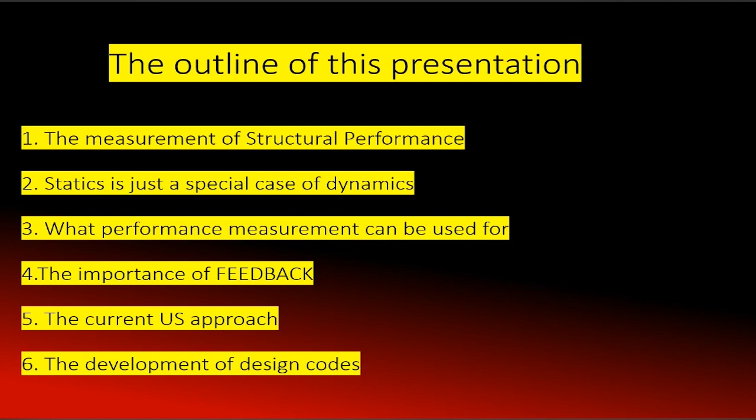This is for archiving data, and we use triaxial accelerometers. These are just about the most sensitive available anywhere in the world. They're actually produced in the United Kingdom.

Now, we need power, which we can get from solar, or if we are lucky, from a building or somewhere close by. And we need to send the data back to our headquarters, which we can do by satellite communication. So everything can be run by solar power, and we send the data back over satellites if necessary.

If you solve it for a single degree of freedom, then the time-varying force acting on the structure is equal to mass times acceleration, and then the opposing forces. The first one is a dissipation term, which is damping. And the last one is the stiffness of the structure.

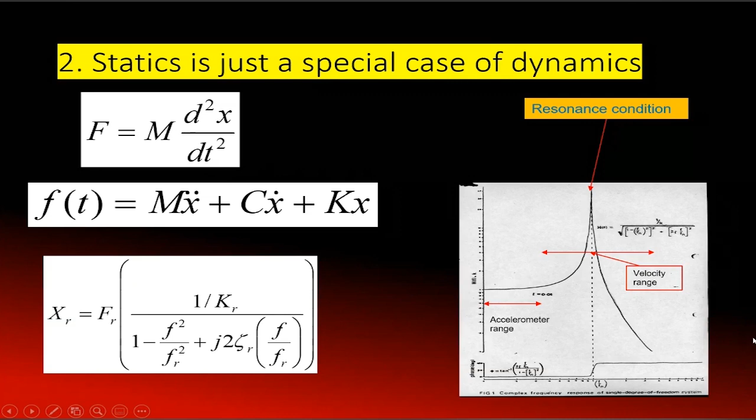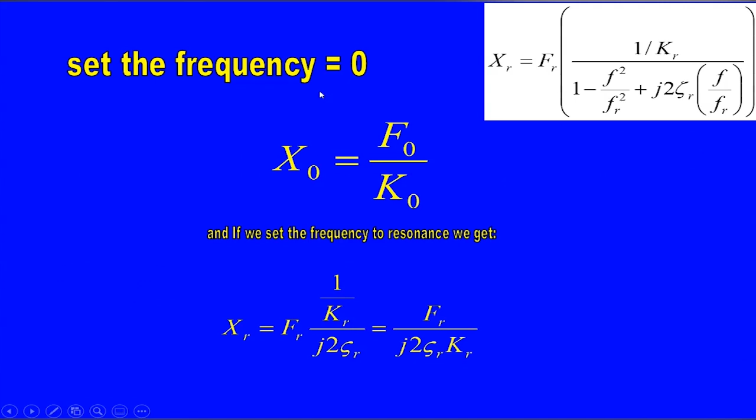That's because if we use this equation, and instead of having a frequency equal to the resonance frequency or a variable, we set the frequency to 0, then we find that the response equals the force divided by the stiffness. Statics, in other words. That's what we teach in schools.

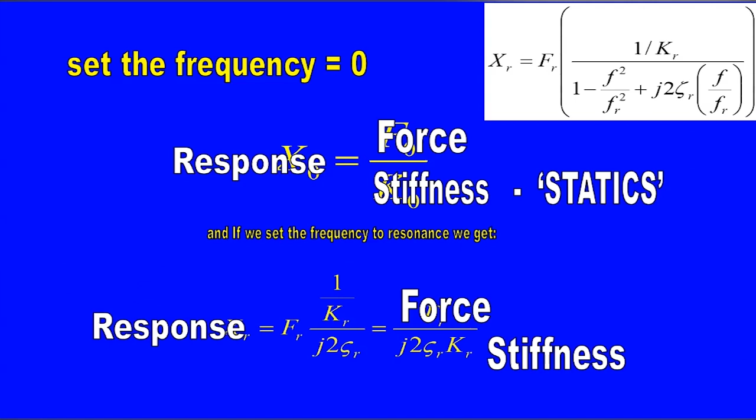But it's only part of the story. If we actually take the frequency equal to the resonance frequency, then we still have response equals force divided by stiffness, but now we have a dynamic magnification factor.

And up at the top right, you see that this dynamic magnification factor is actually 1 upon 2 zeta, where zeta is the damping ratio, and the j square root of -1 shows that we've gone through a phase change as well. So we've got a single equation which we can use either for statics or dynamics.

And that does mean that there's a link between statics and dynamics. The dynamic magnification factor is all important here.

Now, you would think, given that, it ought to be fairly easy. Just divide by the dynamic magnification factor, and you've got the relationship between statics and dynamics. The problem is that the damping ratio is a very complex factor, and it's nonlinear.

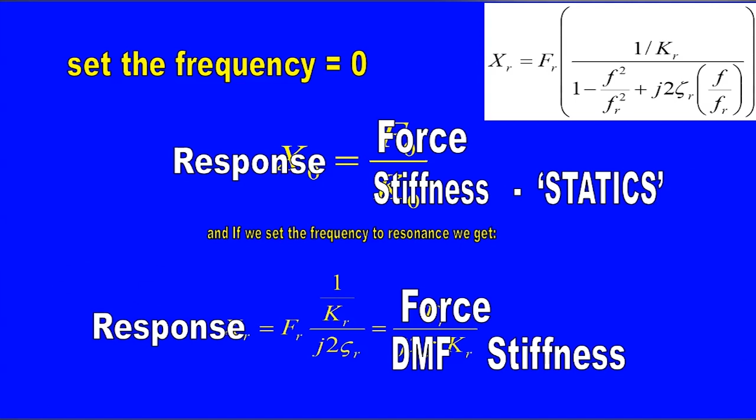For years, that's separated earthquake engineers and wind engineers. But now that we're looking at response, and we understand these nonlinearities a little bit better, we can actually move between the disciplines. So this is what we're actually talking about.

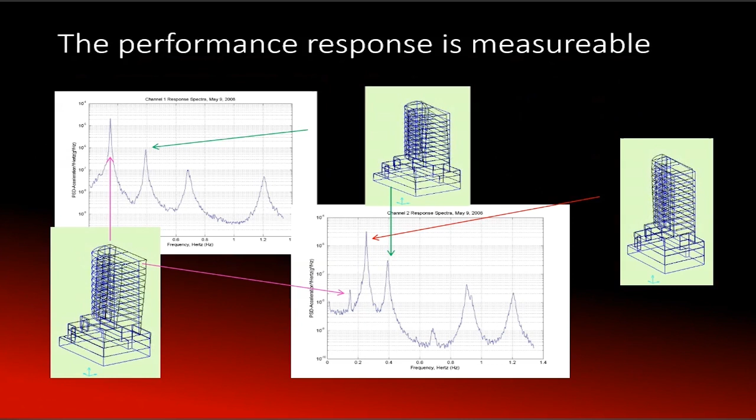Using a power spectrum density, we can actually tell what these resonances are, and there's a lot of extra information as well. Going back to that equation, it's also the equation for design, because it tells you what the displacement is going to be for a particular force. Now we've got the dynamics in there as well. We have the natural frequency of resonance or sway of the structure, the damping ratio associated with that mode, and the mass of the building. But we can alter these things around, and we can say that the risk associated with that structure is its measured response, its measured performance over its expected response.

Now, the expected response is what was used for design. So, in other words, sometimes we have to go back to the codes of practice that were in force when the structure was built, and we compare the measured performance with that.

Now, we can convert that risk ratio, which is a fraction, into a return period or a risk per year. Normally, in the United States, we start off with the 50-year return period, which is a probability of occurrence on average of 0.02 per year. We talk about the 50-year response, but we don't wait around for 50 years to see it. It happens, and it can happen quite often. It's merely a shorthand for the amount of risk that we've got.

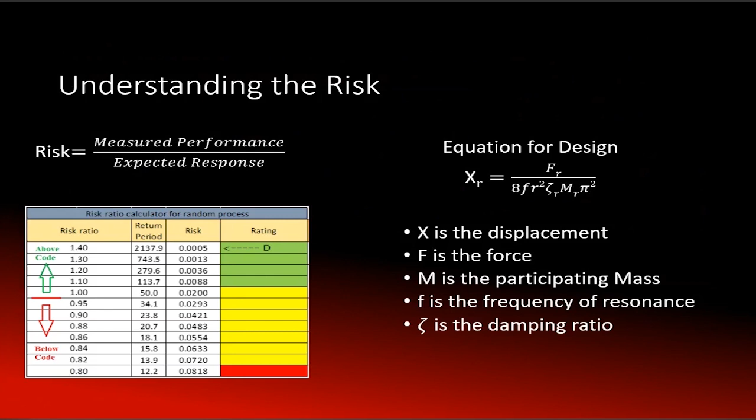Back in the BRE research days in the 1970s, we used an induced vibration scheme. We had 4 synchronized vibrators, and we shook structures. It's the only large-scale set of tests conducted on full-scale structures anywhere in the world. A number of places have done individual tests.

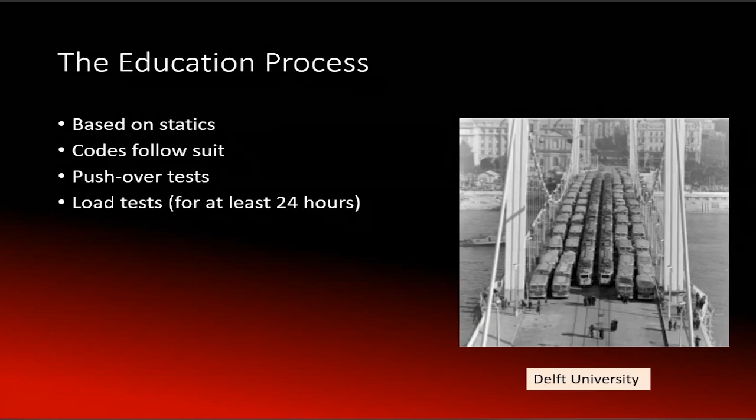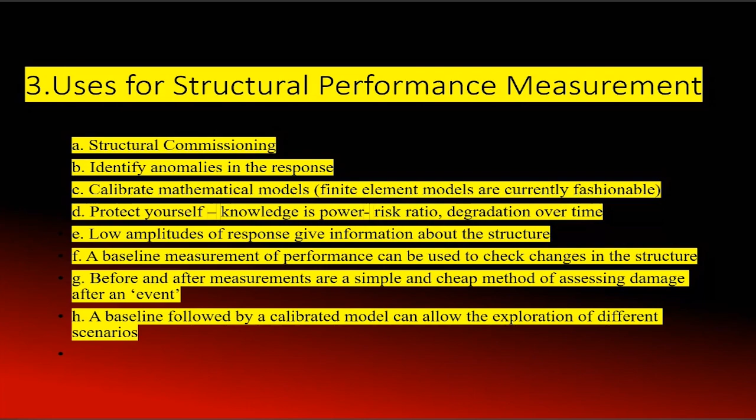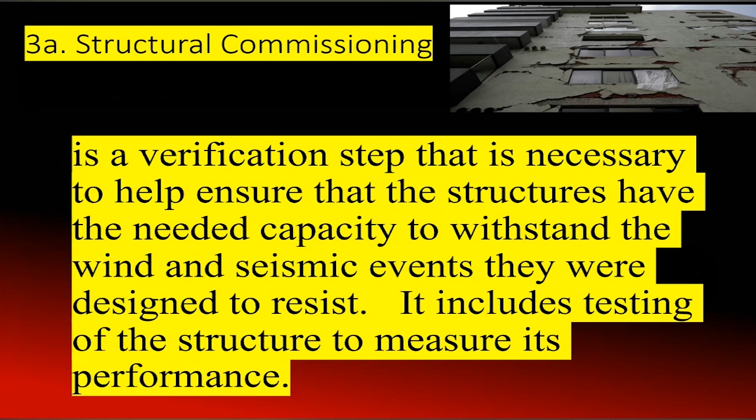So first, structural commissioning is a verification step necessary to help ensure that structures have the needed capacity to withstand wind and seismic events that they were designed to resist. It includes testing of the structure to measure its performance. A big example is the Opal Tower in Sydney.

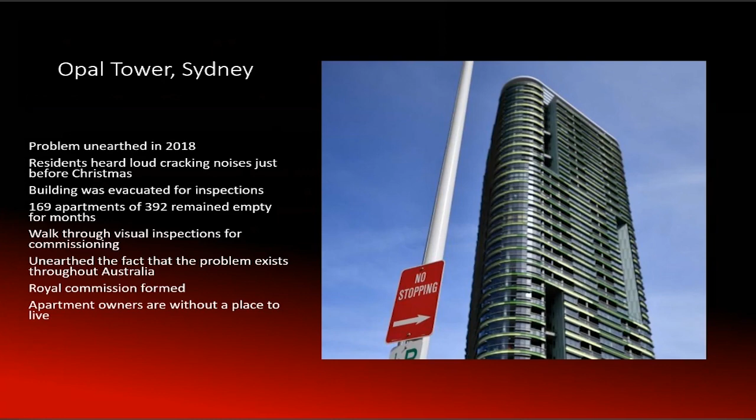There was a lot of complaints. 169 apartments in this prestige building had to be emptied because the residents had heard loud cracking and there was all sorts of damage to the structure. A royal commission was formed. I don't think they have done anything as yet, though, or reported yet.

Anomalies in the response—this I'd like to go into a little bit more detail. This building here is just by the side of the Kosciuszko Bridge. Now, Kosciuszko was a general who fought with the Americans in their War of Independence. The tallest mountain in Australia is Mount Kosciuszko, but it's called that because the mountain looks rather similar to somewhere near where Kosciuszko lived in Poland after he'd gone back there when the Americans refused to pay him.

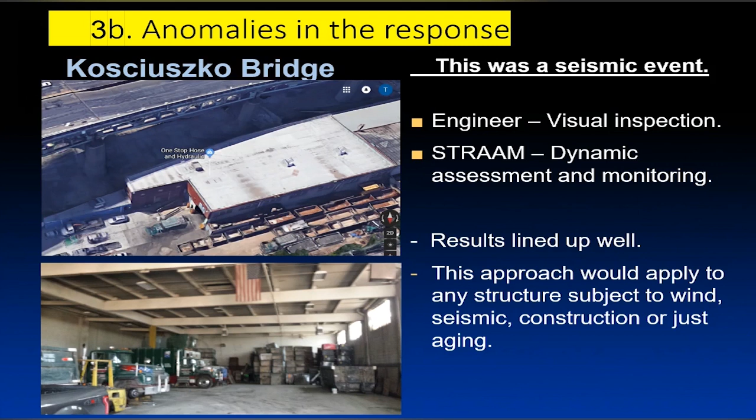So in this particular case, we created a seismic event. If you look in a little bit more detail, there is the Kosciuszko Bridge, and there is our structure. We had a pre-deconstruction assessment before the event. What they were doing was blowing up this bridge so that a new one could be placed by the side of it. They reckoned they were going to have 1.8 inches per second, and the classic information is that at 2 inches per second you're going to be okay.

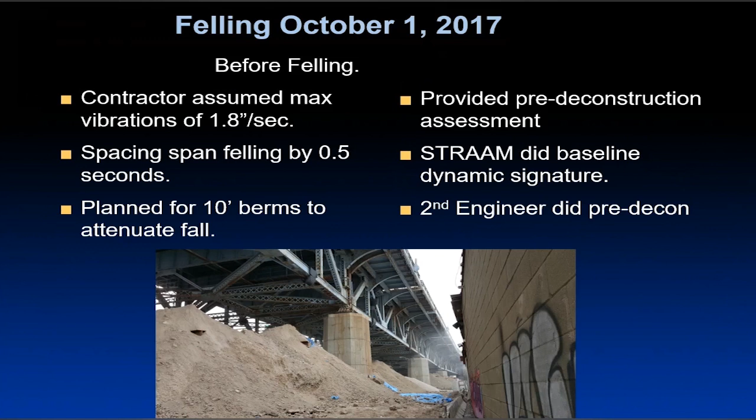Well, we looked at this and found that the structure itself had a very flexible roof, and that in fact, by the side of the bridge, the movement was transmitted over to the back face of the structure. So the bridge was demolished, and the first mode at 3.22 hertz of this structure was only 50% of what would be normal for a single-story structure of this form.

The roof also had a resonance at 3.5 hertz, which was very close to the first mode sway, and it also had very low damping. So we identified what was going to happen if they went ahead with the test as it was—there would be amplification because of the roof movement. So the structure is fundamentally weak.

That's the bridge after it was blown up. We convinced them to increase the size of the berm so that falling sections of the bridge didn't create such a large force, and we convinced them not to blow up individual sections one after the other.

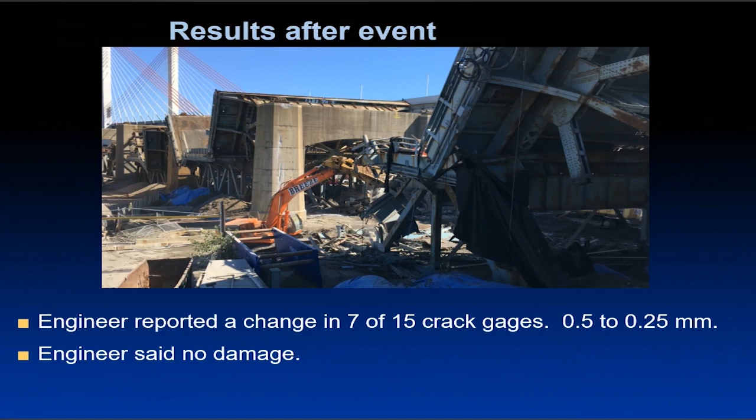The engineer in charge reported a change in 7 of 15 crack gauges of between 0.5 and 0.25 millimeters, and he said there was no damage. We, on the other hand, looked in rather more detail. The frequency changed from 3.22 to 3.15 hertz immediately—immediately, the bridge was felled.

A 2% difference in frequency equates to a 4% difference in stiffness. And look, the shape of the spectral response changed before and after what happened—this is before, and that's after. As a spectral response gets wider, it means that there's more damping.

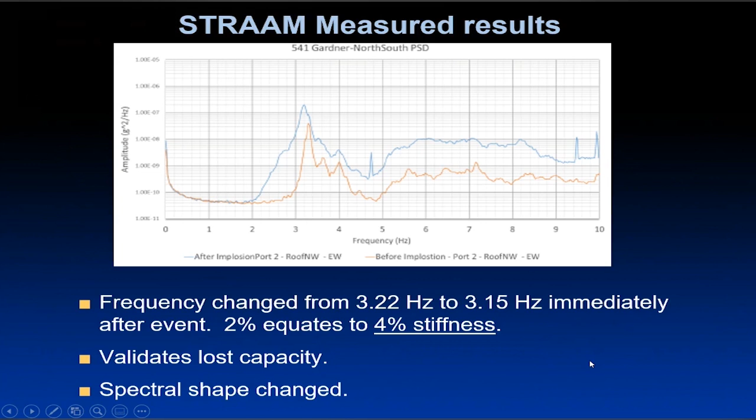Now we use a version of the random decrement signature, which is actually a way of getting nonlinear damping from a structure. There are one or two mathematical niceties that you need to include in your algorithm so that you can get rid of singularities, but it is possible to do, and we've used it a great deal, including calibrating against those induced vibration tests.

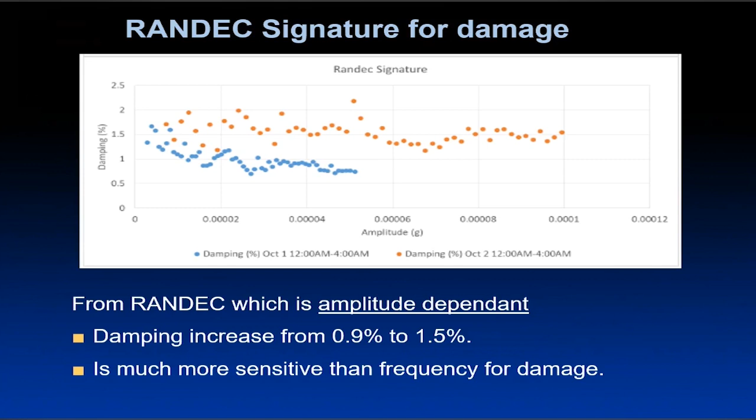So what this did was to show us that before and after, damping had risen from 0.9% to 1.5%. In other words, damping is much more sensitive to damage than is the frequency.

And we calculate the risk ratio and convert that to a return period for that event, which would take the structure outside the elastic range. Before the felling of the bridge, it was a return period of about 13 years. After, it was 2.3 years.

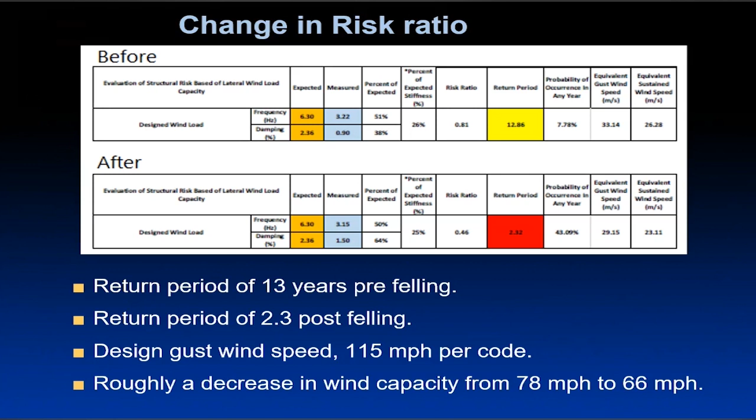So what this means is that the wind speed that would cause the structure to exit the elastic range had reduced from 78 miles an hour to 66 miles per hour. And the code of practice for this region of the United States says a structure should be designed for 115 miles per hour.

Next, the calibration of mathematical models. This is a large arch dam, and you can see it's very easy using finite elements to produce a model that looks really impressive.

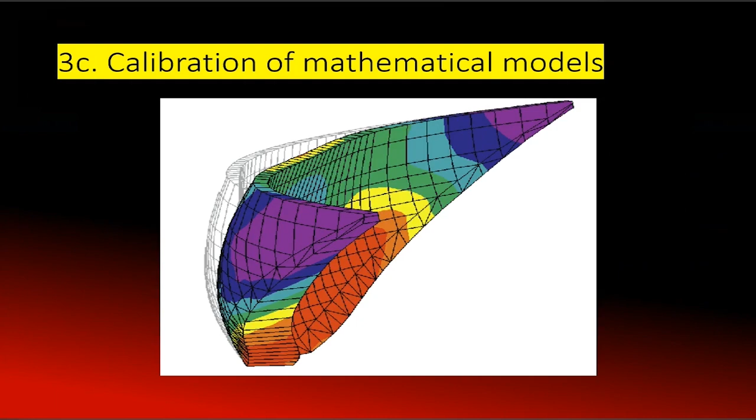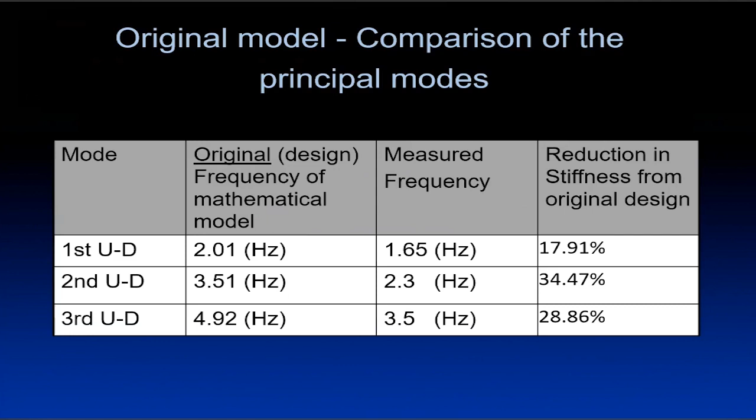The problem, though, is that if you compare measurements with what actually happens - for a very large dam this shows 1.65 hertz measured frequency versus 2 hertz in the mathematical model. So there's an 18% difference between the real response and the mathematical model. In the second upstream-downstream mode, it's 35%.

After we've gone into the calibration of the mathematical model, we're able to get very close to what happens in practice. Now that's only a 35% difference. Sometimes we find differences of a few hundred percent between the mathematical model and the measured response.

The reason that happens is that a person doing mathematical modeling decides what to include in that model, and they can decide not to. If you're doubtful about somebody who is mathematical modeling, ask them, did you include the doors in your model? They'll say, no, of course not. Then you say, glass panels? No. Who decides? Do you decide, or is there some sort of technique that you've got? Of course, it all comes down to skill - some people are more skillful at this sort of thing than others.

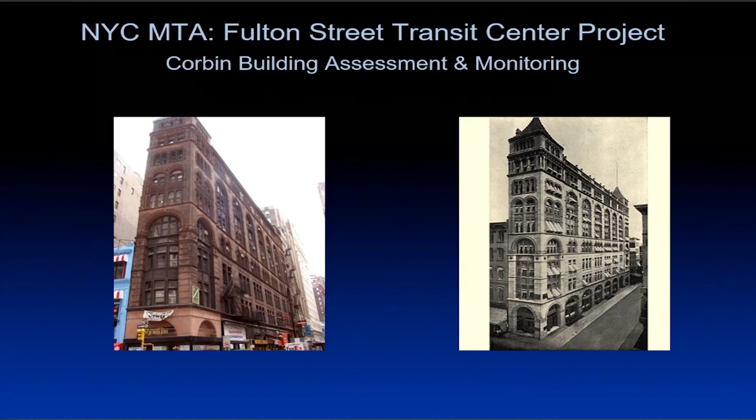Now I want to go to this structure, the Fulton Street Transit Center. The Corbin building is an old icon, and we assessed it and monitored it. Here are one or two views of that building. To the northern side, you can see this great big brick wall and a pit by the side of it where they created the new transit center, which goes down to the World Trade Center.

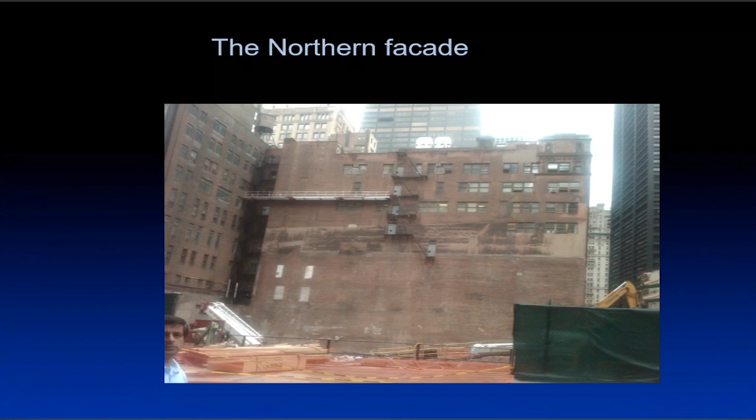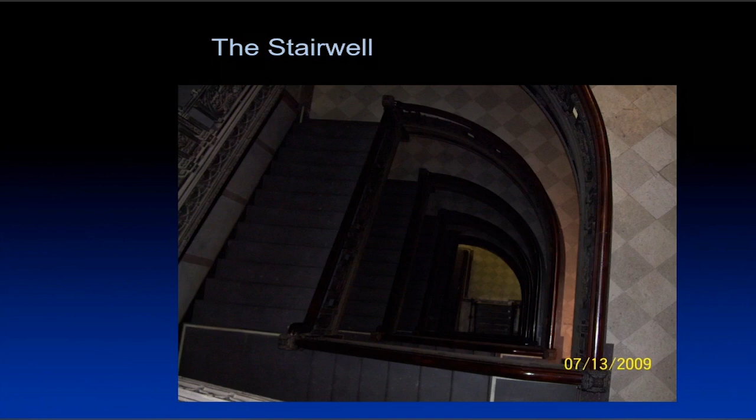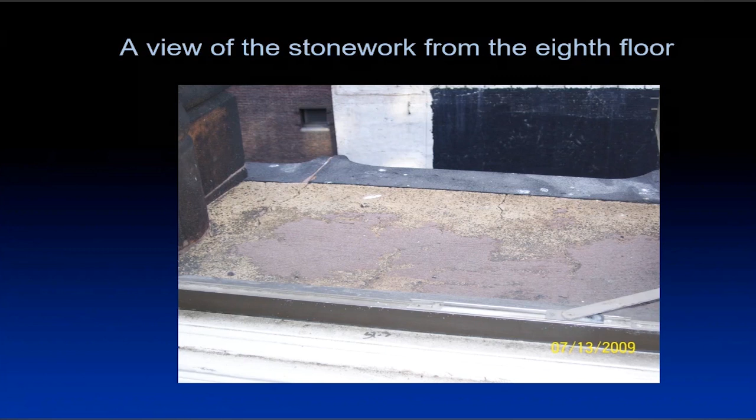Looking at that, they were worried about it. The stairwell in the structure was of extreme importance, and the stonework of the building was of importance. The stonework on the side of the buildings had cracks, and the floors had been partially taken up. There were cracks on that northern wall, but we did have drawings available.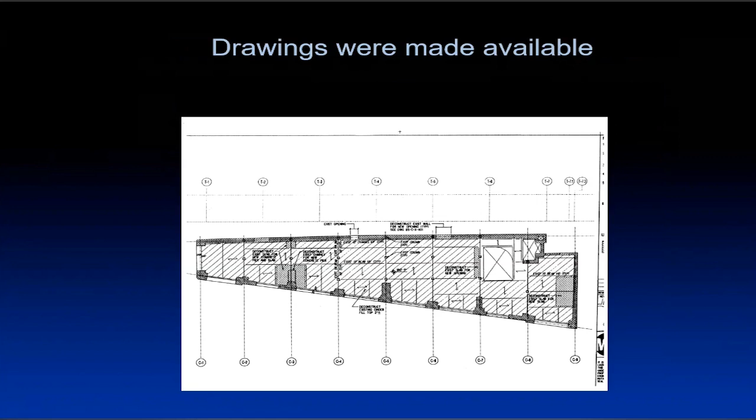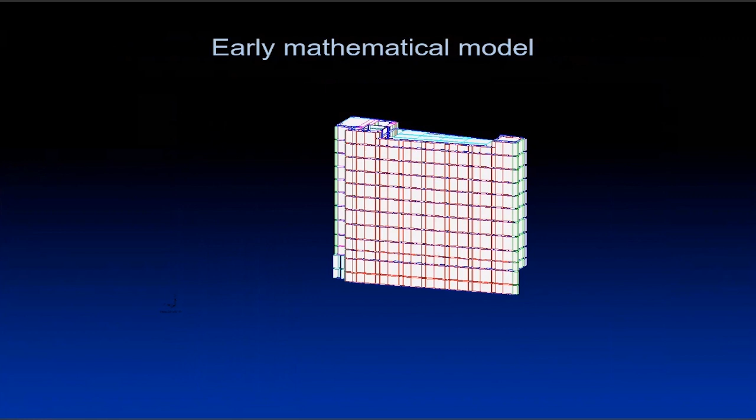I did a lot with this model, and the only way that I could get the calibration was to say the floors are just 2 inches thick. Well, I ran into a lot of flack because of that - nobody builds with 2-inch thick floors, they said.

As a matter of fact, if you take a good look at some of the older subway stations in New York City, you find this same style of construction in there as well.

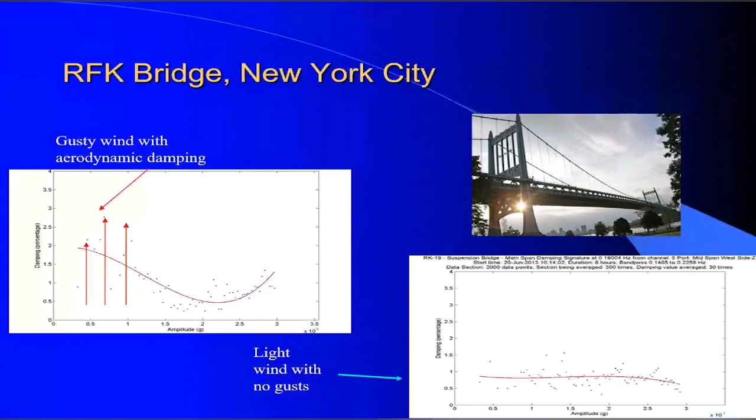The RFK Bridge in New York City is another example of what you can find with structural commissioning and performance measurement. The two spectra here show the damping ratio obtained from the random decrement with a gusty wind, and on the right, light wind. You can see they both come down to about 0.5% of critical, but at low amplitude with a gusty wind, you can actually see the interaction of wind and the structure. In other words, we have aerodynamic damping, and you can measure it using the random decrement function.

The question became: can I go back in? Can I get my belongings? Well, with a performance measurement, it is possible to get a very quick determination of not just whether it's safe to go back inside, but also whether we can get people using the structure again at an early stage.

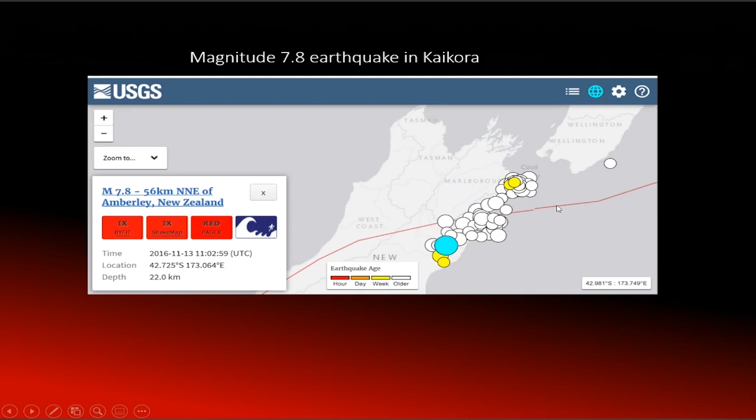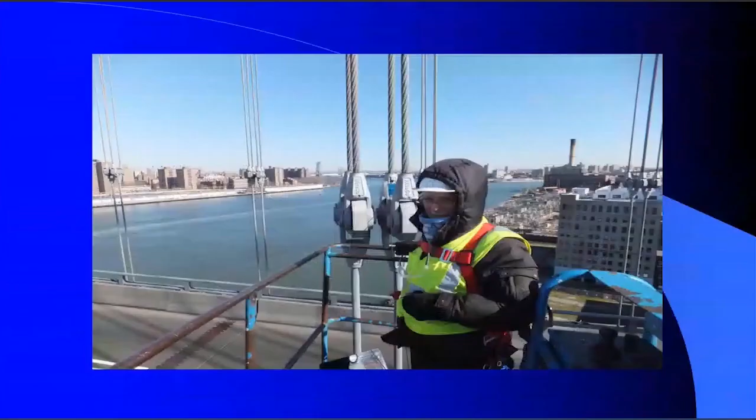Also in New Zealand, we had a magnitude 7.8 earthquake in Kaikoura, on the southern island, and 50 aftershocks which gradually got closer and closer to Wellington, their capital, at the southern end of the North Island. We had done a presentation for them, and as they found these aftershocks getting closer to Wellington, they became interested in what we might do to help them. So we looked at 10 different buildings in New Zealand, in Wellington. And let me say there are various other things as well.

This is the Manhattan Bridge in New York City, and we used performance measurements of the support cables, because they're supposed to be at the same tension. You can actually measure the tension indirectly by measuring the natural frequency of the cables.

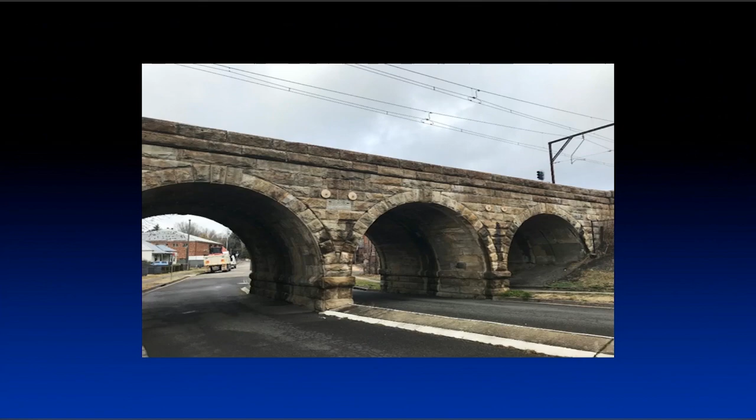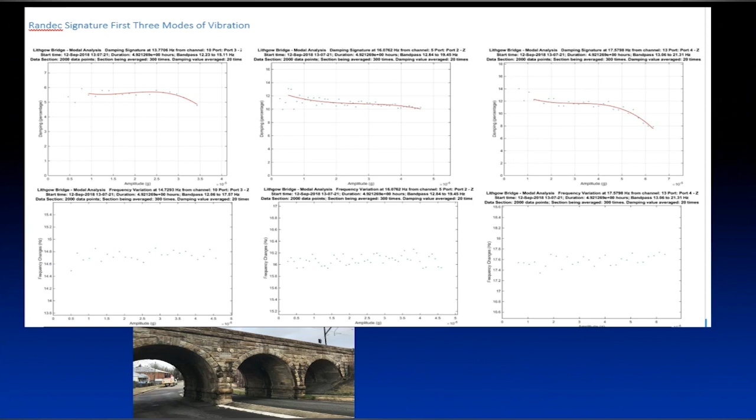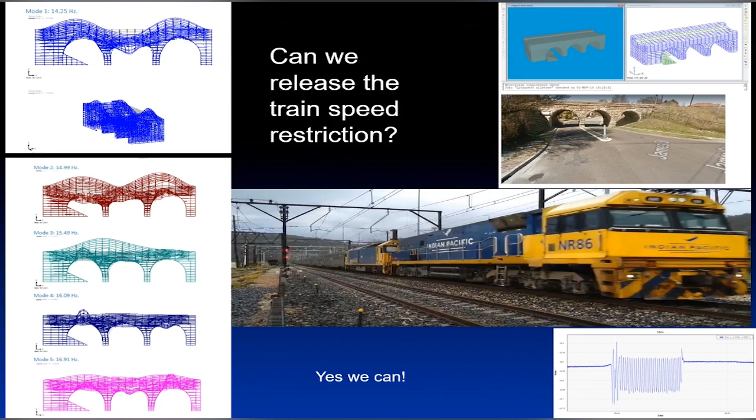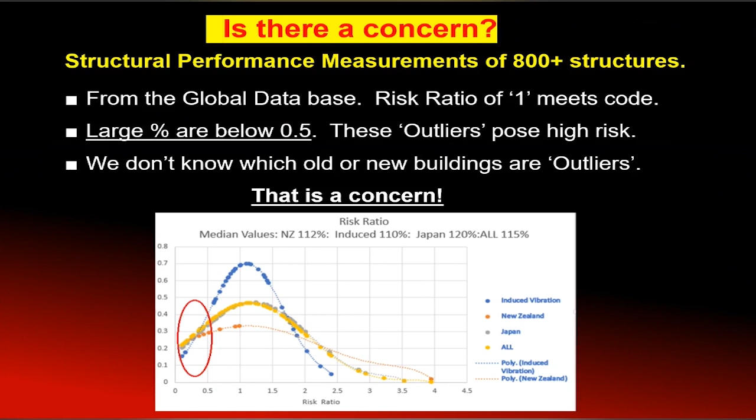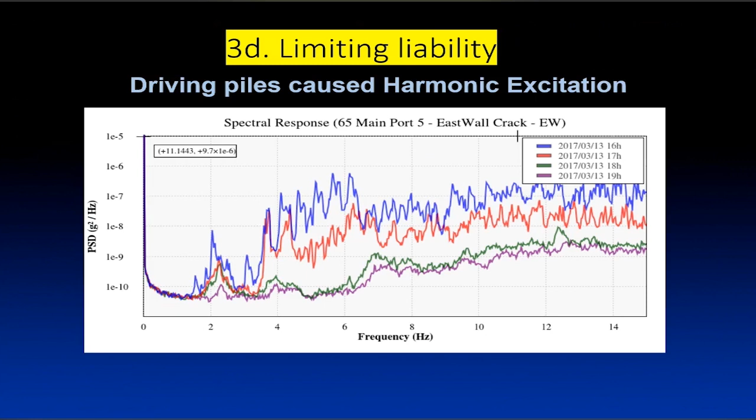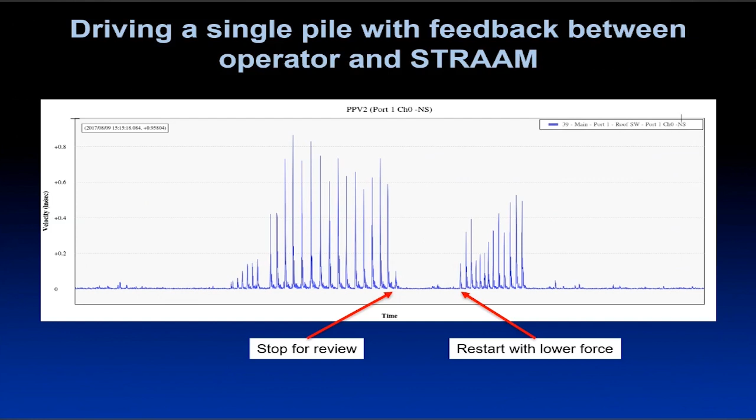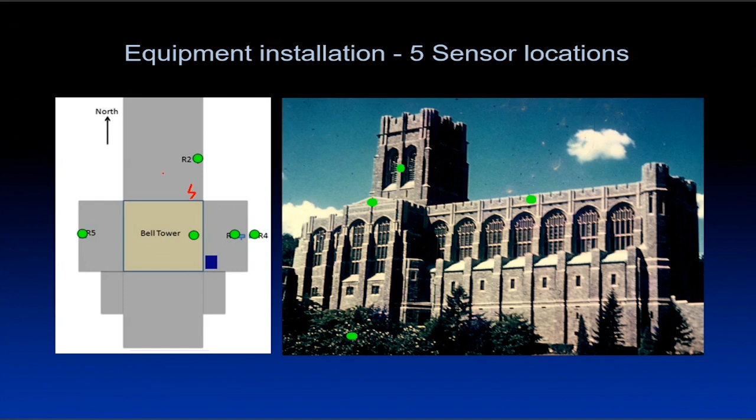Now, this is a really big one about avoiding liability. This is the Cadet Chapel at West Point in upstate New York. What happens here is that they use West Point to add new buildings, and we were looking at this Cadet Chapel. We made measurements, 5 different measurements in the bell tower, on the nave, and at the 2 transepts.

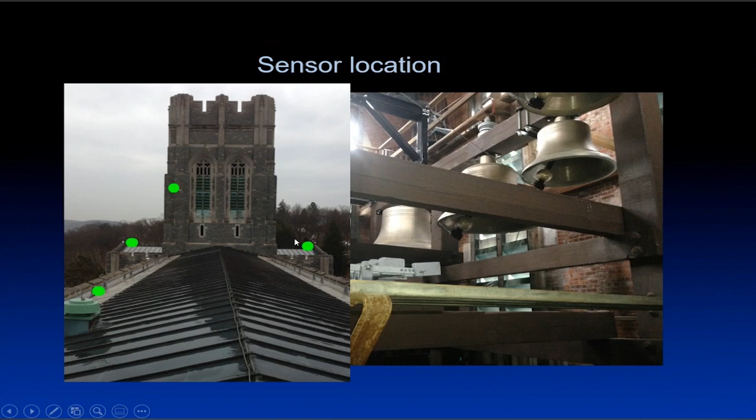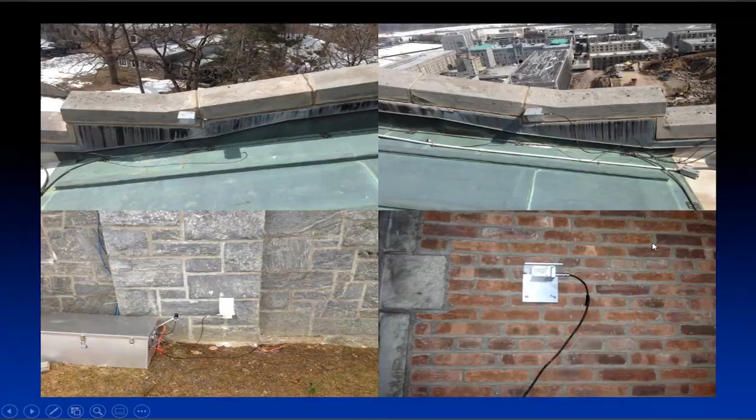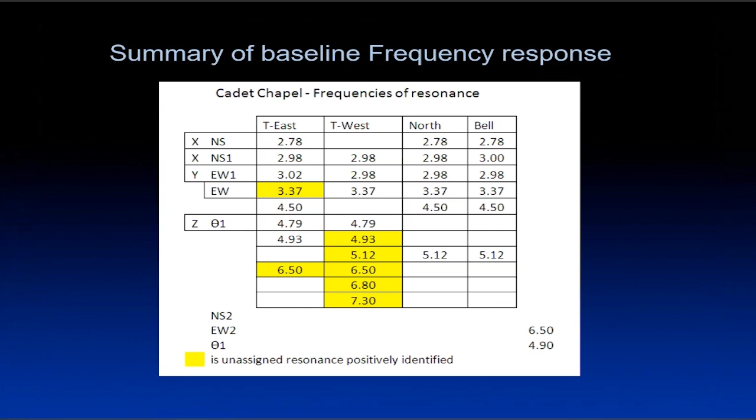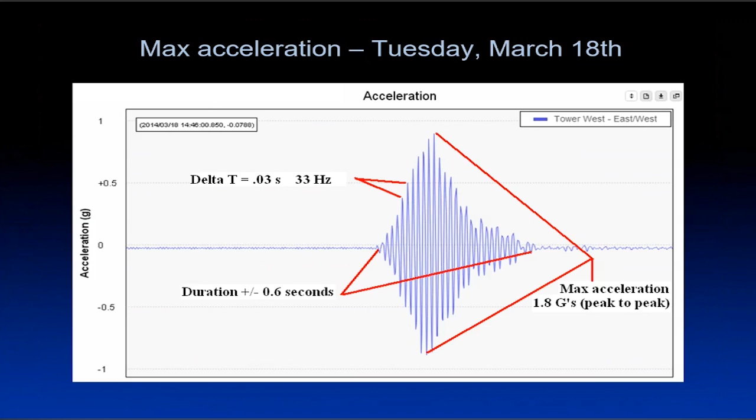So you really need a longer time to identify them. Well, we identified those quite well. And that's a close-up of the acceleration response at the time of one of the explosions, 1.8 Gs peak to peak.

This is the conventional way in the United States of looking at these things, looking at peak particle velocity. In other words, a velocity response. But the problem is, it's fairly easy - you can see the time histories show a very ragged response. To get the frequency correct under those circumstances is incredibly difficult. If you get it wrong, then you translate all these points on this graph off to one side. Sometimes they get a bit bigger, and it's the difference between being above and below.

However, this graph was produced in the 1980s by the US Bureau of Mines. And what it said was, well, we've got a lot of different types of response. We think that if you draw a line in, and this is the line, then you will be safe. So approximately 1 inch per second and 2 inches per second at higher frequencies.

Problem is, the equipment of the 1980s was very inferior to what we use now. Velocity, peak particle velocity, was used because you're operating at the resonance of a transducer, so you get a bigger signal. Well, that was great in the days when we didn't have very good equipment, very good electronics, but now we do. So you can go straight to accelerometers and manage without having to have this extra large multiplication factor.

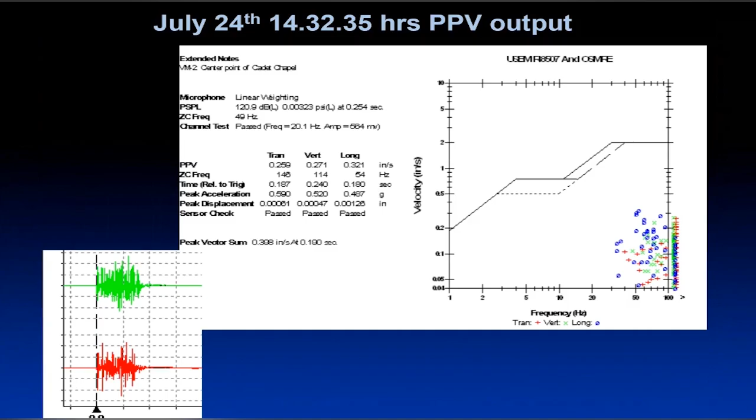What this said, though, was - and this was testing done on wooden frame domestic housing with mining explosions some distance away - it also concluded that the maximum amplification of a structure would be 4 times. We measured on the Cadet Chapel magnification factors of approximately 10, and instantaneous values that went even higher than that. So in other words, between the transept and the nave, we would have increased stresses.

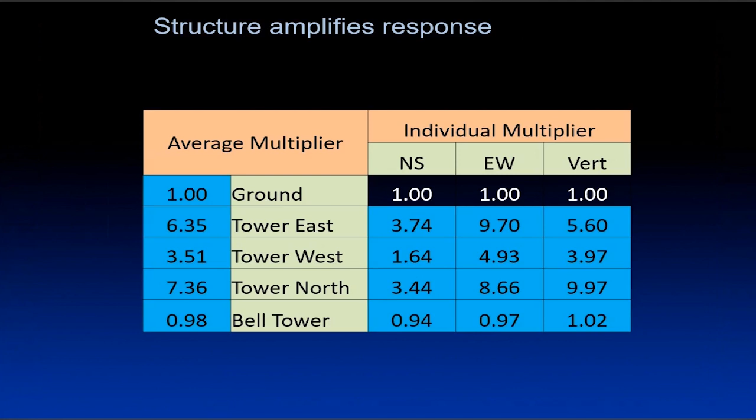We had a big connection and raised the alarm, said if you've got a 10 times multiplication and you're holding the vibration intensity below 2 inches per second, then you've got to actually account for that and reduce the vibration at the base of the structure to 1/10 - well, 10 upon 4, anyway, 2.5 times less. So they did. They did that.

And they said, well, where do you think the effect would be? We told them it would happen between the transept and the nave at the back side of the building, where the transept excitation was much bigger. So they went and had a look and found new cracking in those areas. Under that circumstance, they came to us and said, thank you. If you had not warned us about what was going on, then we would have been out of a job. We would have brought down the roof of that chapel, in which most of the generals in the U.S. Army have been married.

But in practice, we don't need to do that. We can measure under these conditions with just a small amplitude, exclude soil structure interaction, and find out what's happening to the structure. Well, if we do this small amplitude stuff before and after an event, we've got a measure of the structure. Not only that, but we can measure for a long period. And now with our very, very sensitive accelerometers, we don't have to wait for the large events. We can have just a breath of wind, and we measure inside this so-called elastic range.

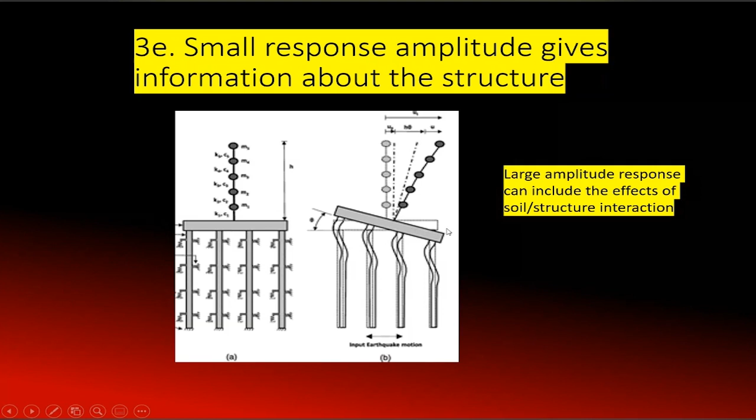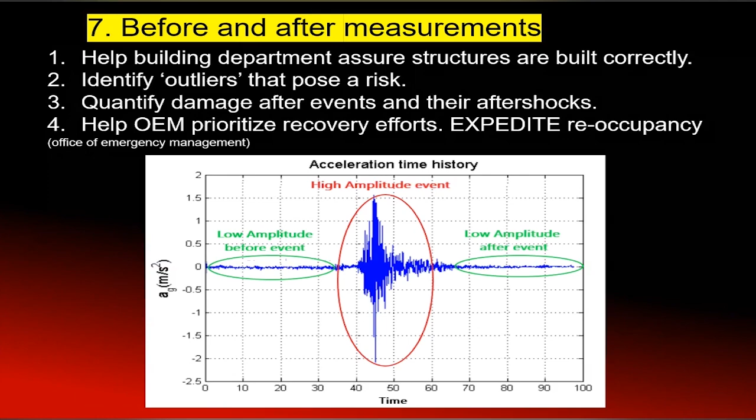In practice, we make these measurements at low amplitude before and after an event, and we can see the changes in the structure. This allows us to look at what's happened to the structure with a large event. We don't have to monitor during the large event, just after. This allows us to expedite reoccupancy of a structure. Next, baselines.

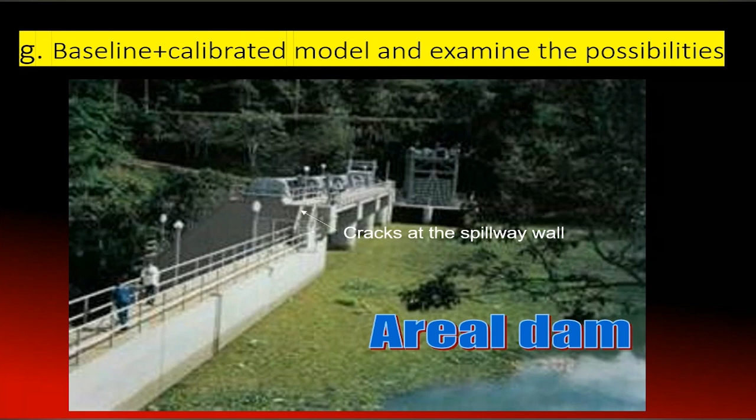If we have a baseline and a calibrated finite element model, we can examine the possibilities. Areal Dam is in upstate Rio de Janeiro and provides drinking water. We measured the response and got the first mode of vibration at 1.65 hertz, and we were able to look at that finite element model and see what might happen to it.

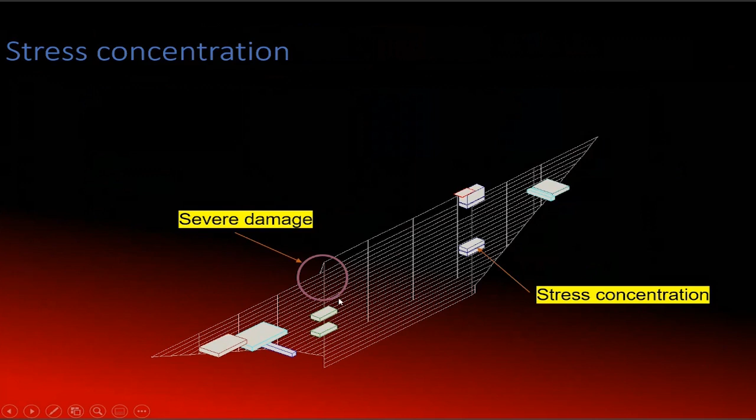What it says is that we have severe damage in some places and stress concentrations in other places. So if we look at the structure, we can say, okay, we have damage in this region, and the calibrated finite element model says that damage will occur in these two regions if it experiences large forces.

So we've got three sluice gates. What do we do? We open the middle one first, this one second, and that one third, depending on the amount of water going over the structure. That way you reduce the forces operating on the dam. Since they didn't have the money to repair the structure anyway, they loved it.

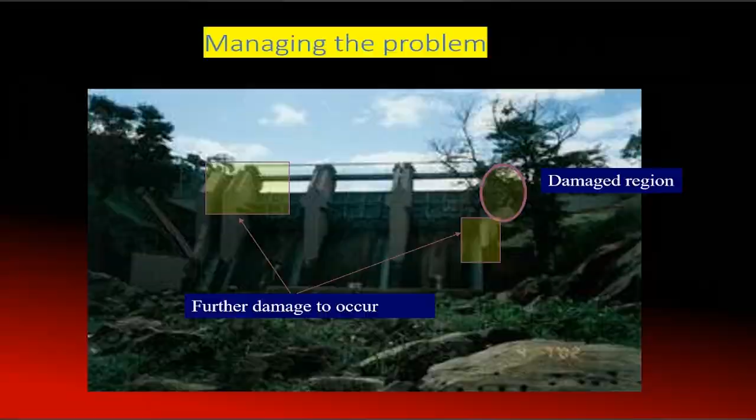The next section is system theory. If we apply system theory to everything we're doing, the whole process of codification, of building, and then using that building — well, the first thing is structural design is intended to deal with forces. We specify the forces that occur on structures, and we do it pretty well, actually. But we don't know that new buildings meet their design intent, or if there are existing buildings that have less capacity and pose a risk.

I was asked a question before we started about older buildings, and we have actually tested an 80-year-old building in New York City, one which fortunately had some very early measures of frequency. So we had effectively a commissioning of the structure done, and we were able to go back and take a look at it. It had lost, over the 80 years, something between 10 and 20% of its capacity. Still okay, because it was built with a lot of spare capacity.

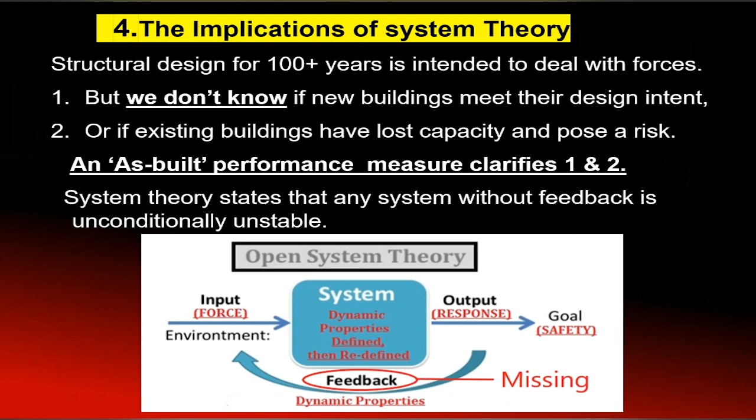But system theory, when applied to this whole process, states unequivocally that any system without feedback is unconditionally unstable. In other words, if we don't find out what our structures are doing, then something is going to go wrong sooner or later. So that's why we're saying, yes, we should actually be looking at the response of structures.

The US has actually identified that this could be a problem, so they formed a committee. The US has an international building code, which only applies in the United States at the moment, but it has a very good document, ASCE 7-16, in which lots of aspects with similarities to Eurocodes, to the best codes around the world, are contained. In fact, people on code committees tend to share information anyway, so it's not surprising that similar advice appears.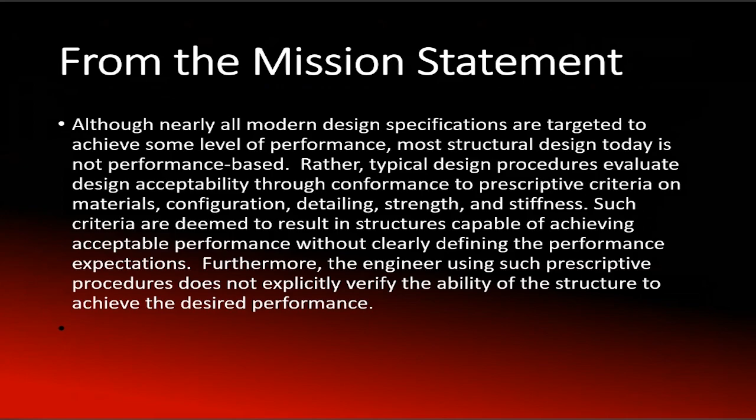This is the sort of thing that's happened. First, the Tay Bridge disaster in 1879, a dreadful thing, was a storm. The bridge collapsed as a train was going over, and a lot of people were killed. So after that, instead of 15 lbs per square foot, instead of 10 lbs per square foot, the requirement was increased to 15. The Tacoma Narrows really showed us that dynamics was important, and again we just went to 30 lbs per square foot.

And then we started introducing dynamic effects. Between 1950 and 2000, codes were prescriptive. In 1989, the National Institute of Standards and Technology and the National Science Foundation actually identified that performance assessment goals were important. And then the report sat doing nothing for another 30 years.

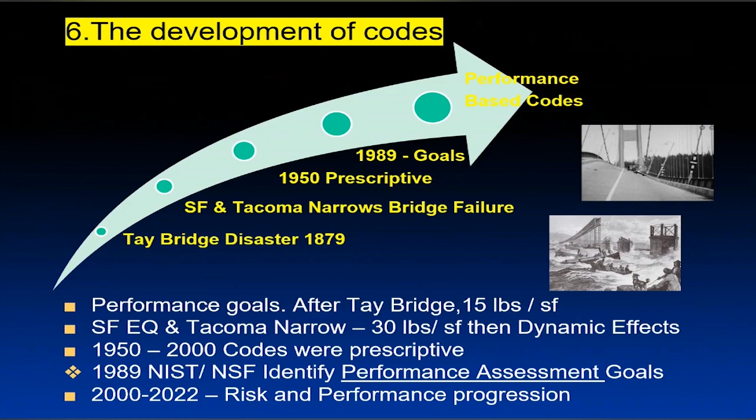So right at the moment, we stand on the threshold. We are able now to move into the realm of performance-based codes. What we're saying here is that the majority of design codification that has happened is involved with specifying forces. We do it on the basis of a return period, or rather a risk that we think is acceptable, and we work on that. But we haven't got dynamics into the codes. What we have is quasi-static forces. We work out a response, and then we put a dynamic magnification factor if the building or structure meets certain criteria to make dynamic response important.

Dynamic response became appreciated by the work of Alan Davenport at the time. He was at Bristol University, subsequently moved to Canada. He did a lot of work with wind engineering, very good work, absolutely revolutionized it. And what we had then was effectively mean and gusts, which were important.

They still get confused. People talk about the two things interchangeably, and we use a 3-second gust at 10 meters for design these days. The reason we do that is that we think we know the relationship between the gust and the mean wind speed. We don't. It changes under a whole series of different conditions, like the boundary layer, like zero plane displacements. These have their effect, and it can be quite complicated. I would far rather that we actually used the mean hourly wind speed that we used to in the United Kingdom a long time ago. But 3-second gust is the flavor of the day.

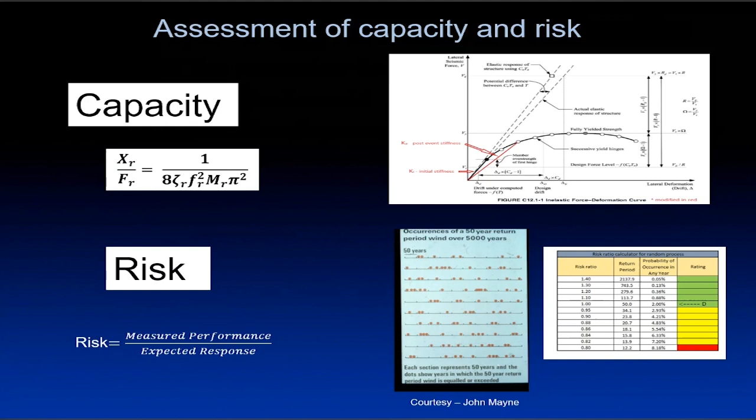So in other words, just by looking at the length of span or the height of a building, you can have a very good estimate of what the frequency is going to be for these structures.

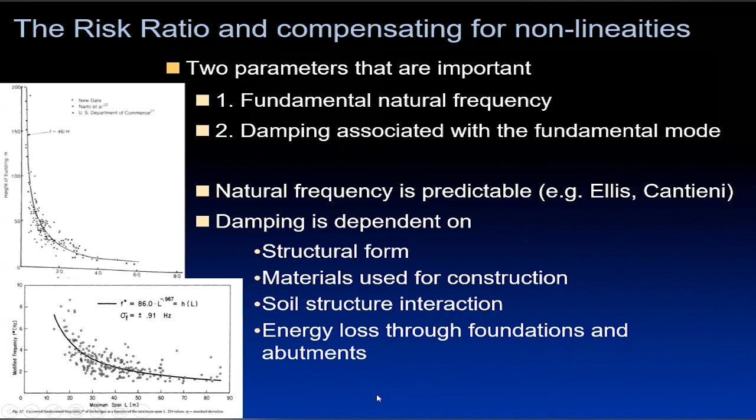What about damping? This diagram here is produced by Yukio Tamura in Japan. There is a 3-part curve as an estimate of what damping should be. There's no elastic zone, it's actually an approximation. So what you've got is a rise in the damping characteristic as the amplitude of response gets bigger, as the matrix of the material in the structure creates areas that rub. In other words, it's not viscous damping, it is friction damping. If you take enough friction elements, then what you have is something that approximates viscous damping.

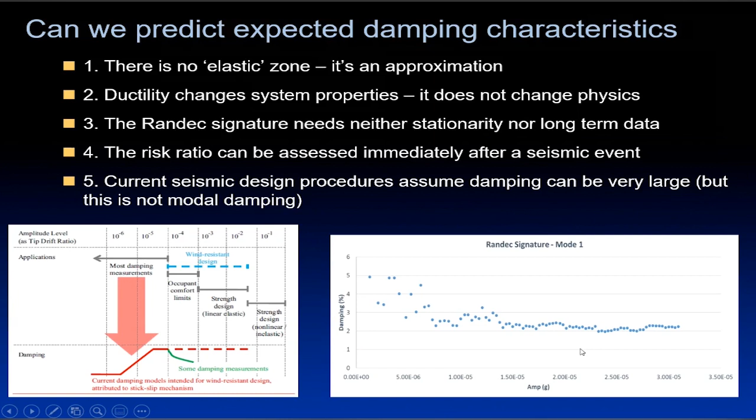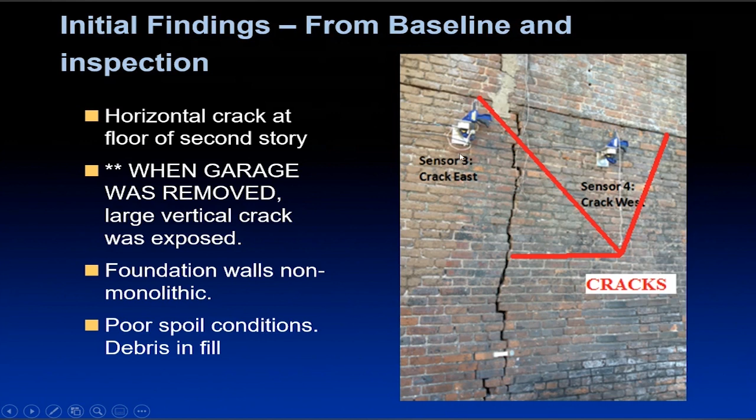A Randec signature from a mode you can see quite often, we have high damping at low amplitudes. So what's going on? Well, this structure in New York City, we had a garage just in front of this and a new HVAC unit going in there. When they took the garage away to do some work, they found this great big crack and they repaired it. We put 2 accelerometers on either side of the crack. So what you have here is a picture of the most expensive crack gauge anywhere in the world ever produced, because they're about $3,500 each.

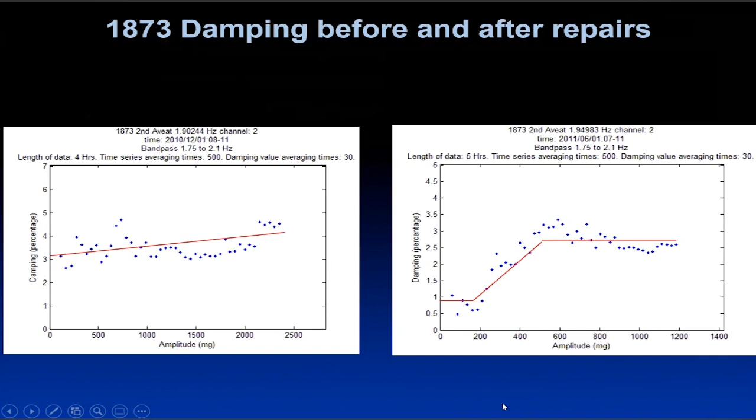And this was what happened with the damping characteristic. Before, we had a rise in the low amplitude of damping, and after they'd patched up that crack, we had this 3-part curve. So in other words, just in one test, we verified this 3-part curve. And in fact, once again, Yukio Tamura's curve says we've got this 3-part curve, but we also look at what happens, we get rises in the low amplitude plateau when there's interaction going on with the structure and its surroundings.

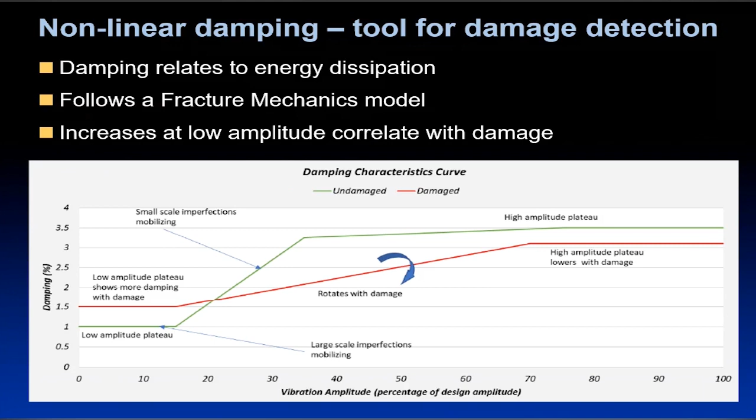We get this rise with damage. The curve rotates, and then the high amplitude plateau lowers if there's damage, because of all the minor damage elements in the structure having just used up their energy.

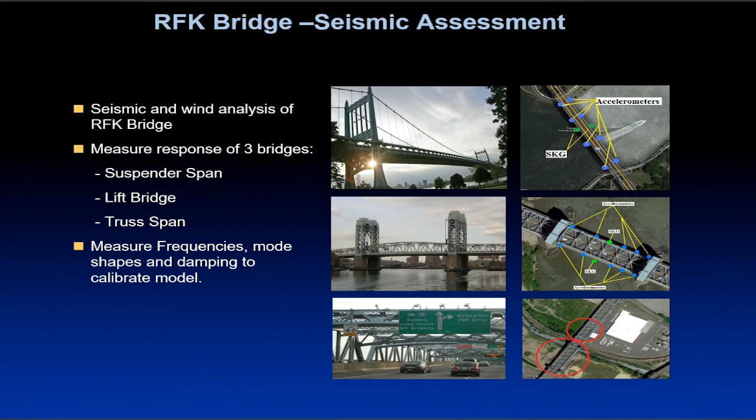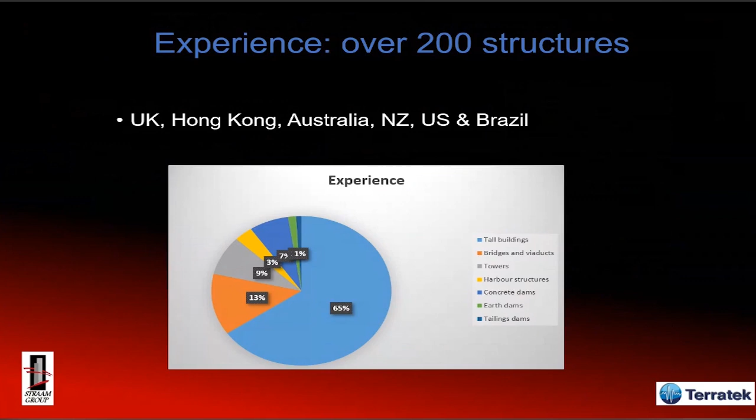So finally, why is it so valuable? Well, the first thing that we do is to say to people, use this technology and it will save money. It identifies weak buildings before the damage becomes so intense that you've got to do something in a panic. You can prioritize budgets, because if you know your group of structures that you're responsible for and which are the weak ones, fix the weak ones first. And with that, you can spend your money more efficiently.

You can assure that work meets the design intent. That's commissioning. So if we do that, then we can see that the structure has actually risen to or above the design intent. After events, quicker reoccupancy.

In Christchurch, there was a building which survived the initial earthquake. It then had a series of smaller earthquakes, and with a smaller earthquake, it collapsed. And yet people were ready to say, yes, it's okay, it must be okay because it survived the earthquake. Well, in practice, if you go in looking at the performance of the structure, you see a gradual ratcheting down of its capacity. So these objective measurements help assure safety.

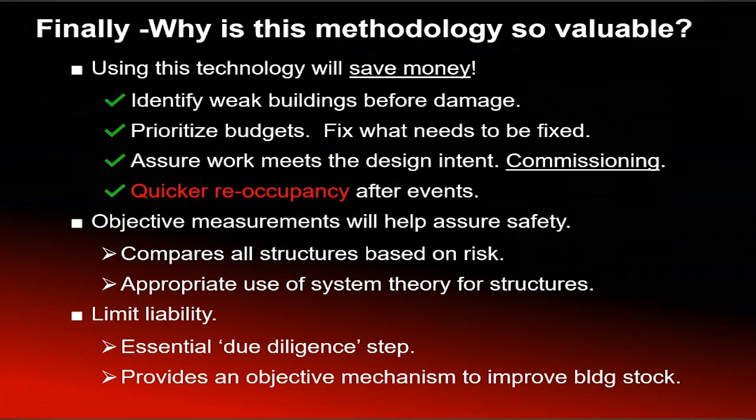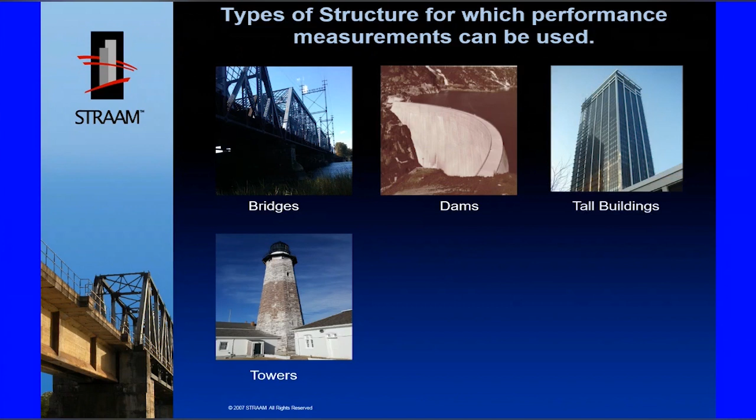So finally, there are various different types of structure that can be used with these techniques. In practice, there are all sorts of different types, and any structure that can be viewed as a system can be subjected to a performance assessment.

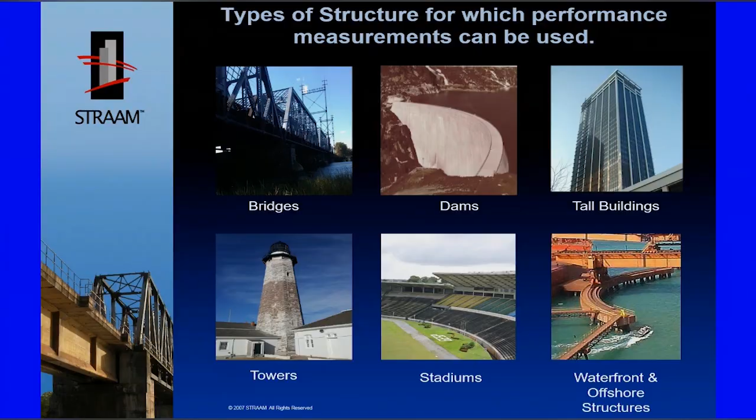Fantastic. Well, there we go. Alan, I could probably speak to you all evening if I was allowed to. But we've got a really good collection of questions, so we'll start running down those in a minute.

But I guess my takeaway is that we're always learning something when we measure. And I suppose I was reflecting on the fact that we so very rarely get to measure the buildings that we build, and maybe that's one of your key messages.

I also was thinking that actually our ability to predict the performance of our structures is perhaps not always as good as we might think it is. I probably spent the first 25 years of my career thinking I could predict anything if I put enough finite element power into it. I think I'll spend the next 25 years concluding that everything is more complex than I ever thought it was.

I just wanted to come in with this question to get us going. You've learned an awful lot by having that ability to both model and to measure structures. I wondered if you could share with us what's been your biggest surprise in that process of modeling and measuring?